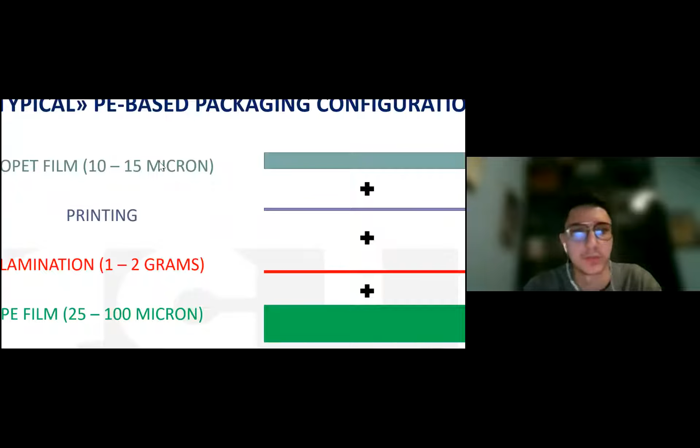Here we have a typical PE-based packaging configuration, where we have the BOPET film that is printed, then laminated with PE film. So we have two types of film, the BOPET and the PE. These are the key features of the BOPET film. Excellent printability thanks to its stiffness, excellent flatness and thermal stability with the consequent excellent workability in converting, excellent transparency and brilliance, then also some bad properties like poor weldability, poor resistance to puncture, and difficulty to recover once laminated with PE. Always, this is the most important point.

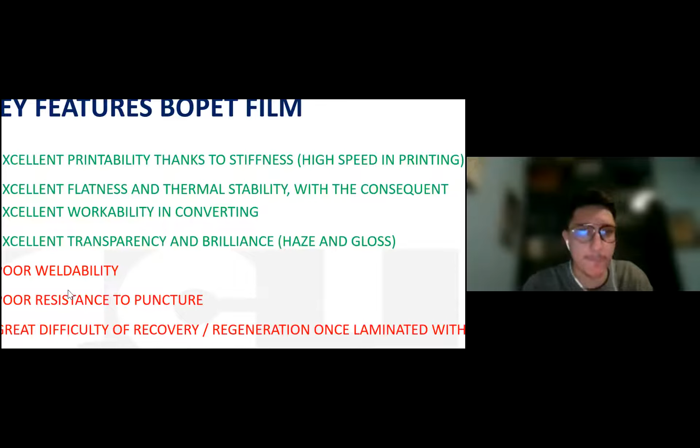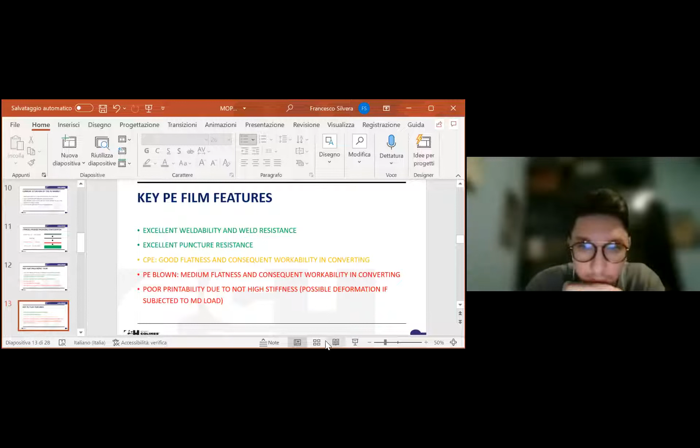Sorry, Mr. Francesco. There's a slight issue with your slide. We couldn't see your whole presentation. It's cut off at the sides. Are you able to perhaps stop share and reshare? Yeah, I can try to do something, sorry. Okay, thank you. You still have this problem, right? Yes, we still have the problem. Perhaps you could exit the full screen. I think we can make do with just sharing this. You just have to zoom in a bit, then it will be fine. I'm sorry for that. No problem. Francesco, can you try to go down to the bottom, click on that, no, this one more to your right. See whether it works. No, it doesn't work. It's still facing the same problem, because it doesn't fit into the frame of the screen.

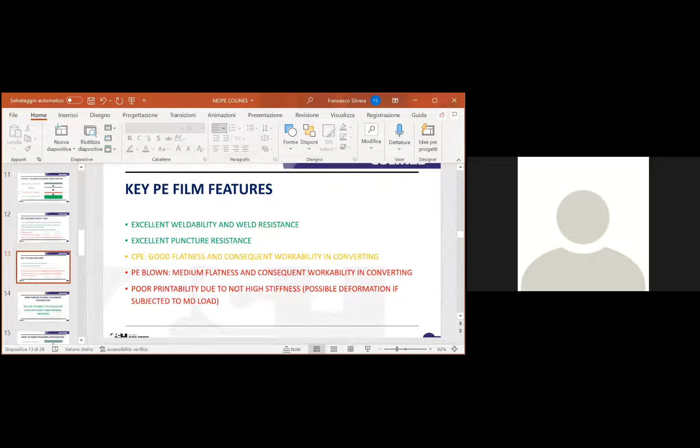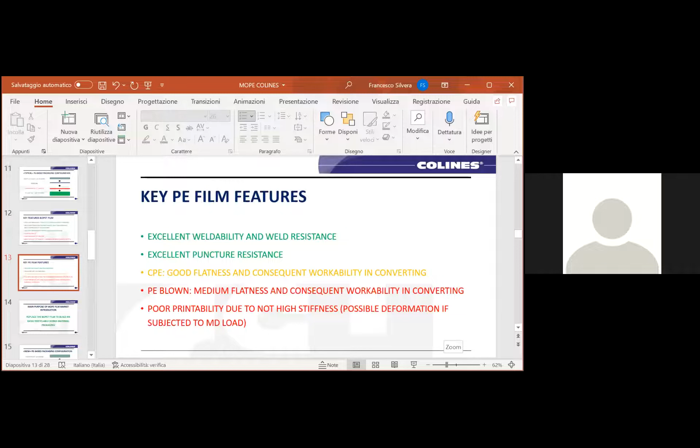Yeah, because I think it's in 69, but the presentation has to be made in a different configuration. Can you reduce the size? The sliding scale there, you put 62%. Bring it down a bit more. Like this? Try that again, a bit less. No, a bit less. Some more. Okay, now click on full. Okay, perfect. It's still a bit, but it's better. Go back and reduce further. Okay, click on that now. I think this looks better. Okay, thank you. Sorry.

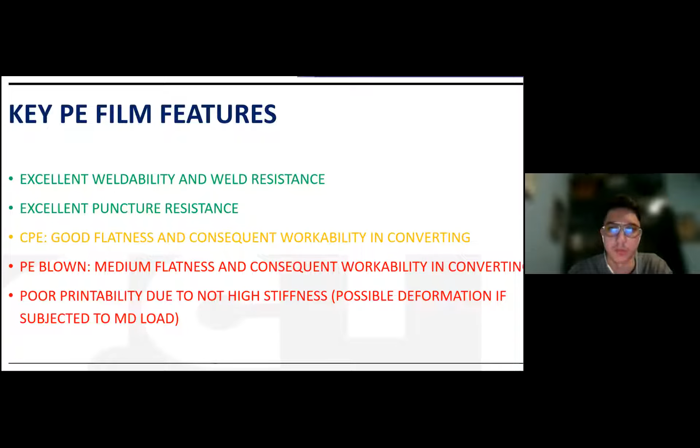So, as I was saying right before, the PE film is laminated with BOPET, and with the PE film we have excellent weldability and weld resistance, excellent puncture resistance. When we have the CPE film, we have good flatness and consequent workability in converting. And then we also have some bad points, like PE blown has medium flatness and consequent workability in converting, and poor printability due to not high stiffness.

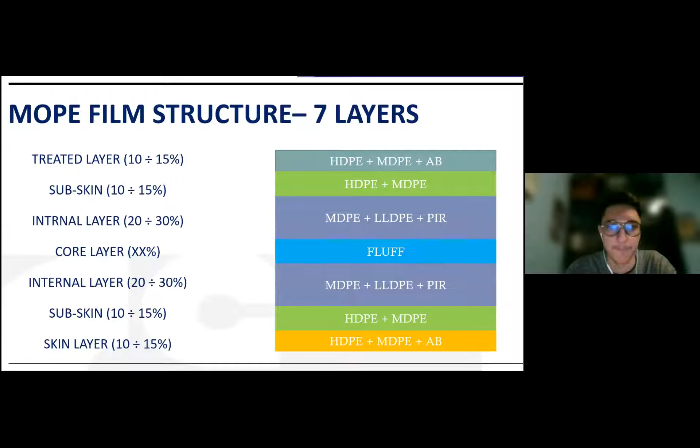What about the raw materials in the processing of the MOPE film? The skin layer needs to be a material that guarantees thermal resistance in the welding operation. Subskin may contain material that helps the stretching process, as well as the core layers. So core layers and subskin have to be material that can help the stretching process. This is the most important process in the MDO unit.

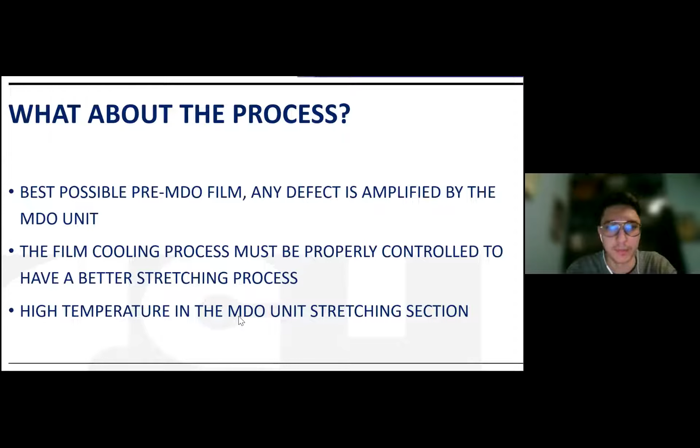What about the process? You need to have the best possible pre-MDO film, because any defect will be amplified by the MDO unit. And the film cooling process must be properly controlled to have a better stretching process. And you need high temperature in the MDO unit stretching section.

Now we'll show you some of the current limits of the actual MOPE blown production, because the production of MOPE film right now is basically only in blown lines. And we have features that are not satisfying in terms of transparency and planarity. We have limits in terms of productivity compared with the cast line, for sure. Possibility to produce only asymmetric film, and a lot of trims that must be regranulated, so we have high cost, and the pellet is not as good as the virgin material, for sure.

What about the cast technology? Why is Colines developing the MOPE? Because you can have higher productivity and higher speed than blown technology, better transparency, better and stable control on the profile, and overall inline trim recovery without any waste. So trims are directly reutilized in the MOPE production. Inline, this is inline recovery for sure.

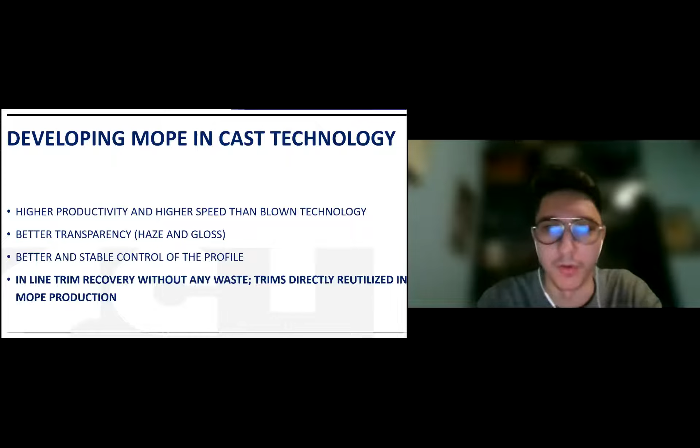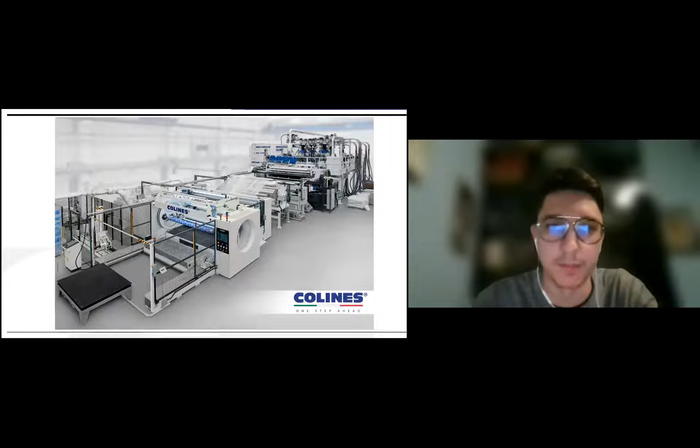And finally, this is our lab line where we produced both CPE film and MDOPE film, and we already have some reels that we can share with our customers or whoever is interested, and we also made some samples of printed MDOPE film, and the results are very, very good, as you can see.

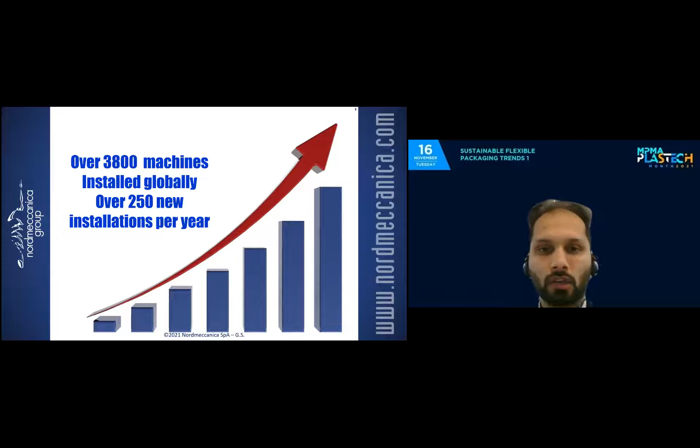Now let's see what are the Nordmeccanica solutions for addressing sustainability and recyclability. I have divided the next sections into three parts: solvent-based and water-based coating and lamination, solvent-less lamination, and Alox barrier mat coating. Let's start with the solvent-based and water-based lamination.

What are the adhesives available on the market nowadays? We can distinguish them into two main categories: low solid percentage adhesives, with 30% resin and 70% solvent, or high solid concentrate adhesives, for example 50% resin and 50% solvent.

And what is our task? Our task is to get the printed web and then laminate it. And how does printing evolve? We have several colors which are combined together in order to get the final image.

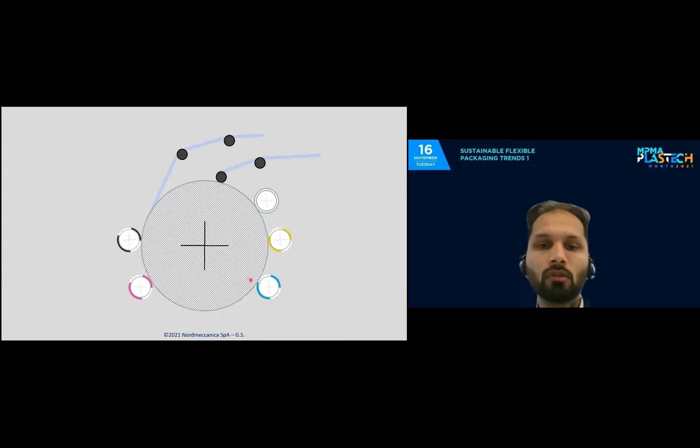Suppose we get the printing, for example, in a flexo printing unit: we have white, yellow, blue, red, and black. If we look at the clear web, how the printing evolves, first we print the full layer of white, then yellow, red, blue, and black. At the end, we get our final image.

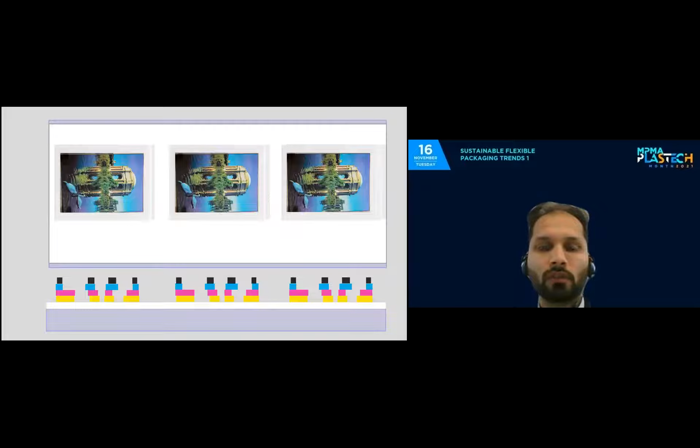So what is the task of the lamination and of the adhesive? It is to apply sufficient adhesive, or a thickness of dry adhesive, that is sufficient to guarantee the required bond. If we consider low solid adhesives, we are applying, for example, 3 grams per square meter, and since this is a 30% solid adhesive, we require 7 grams per square meter of solvent. Likewise, if we consider high solid adhesives, the required dry coating weight is exactly the same, 3 grams per square meter. Instead, for the solvent, since this is a high solid adhesive, just 3 grams per square meter is required.

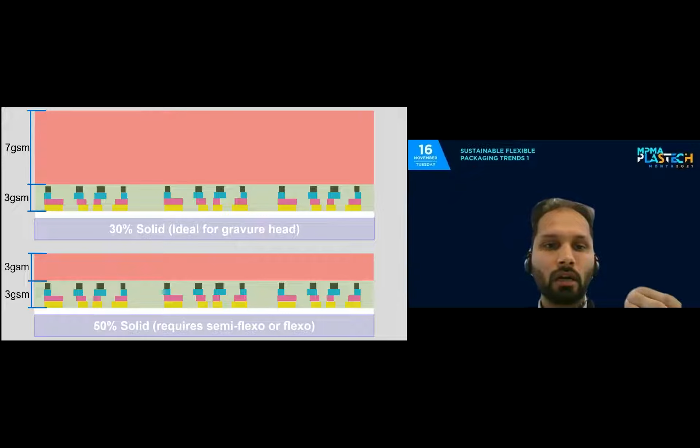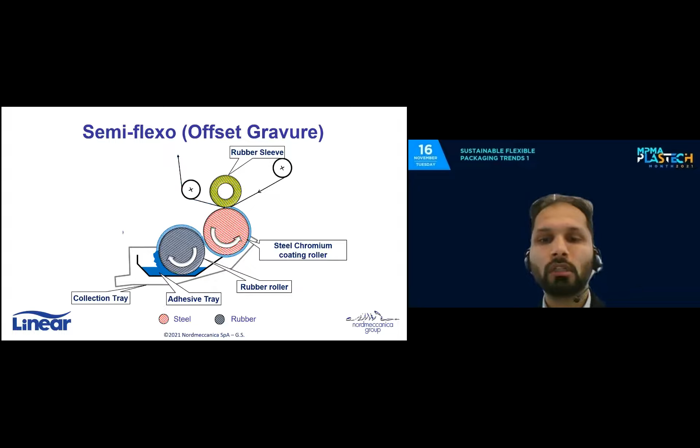One of these is the Nordmeccanica Semiflexo, made of one rubber roller, one steel chromium coating roller, and one impression roller. The rubber roller collects the adhesive from the adhesive tray and transfers it to the steel chromium coating roller. The beauty of this trolley is that both the rubber roller and the steel chromium roller are smooth rollers. By simply playing with the speed of these two rollers, it's possible to adjust the coating weight.

Here's the beauty of it: this is what we have just described. If we play with the speed, we can change the coating weight. With the semi-flexo, it's also possible to work in counter-rotation to apply higher coating weights. Apart from the semi-flexo, we also have in our portfolio the flexo coating 4-roller system. How does this system work?

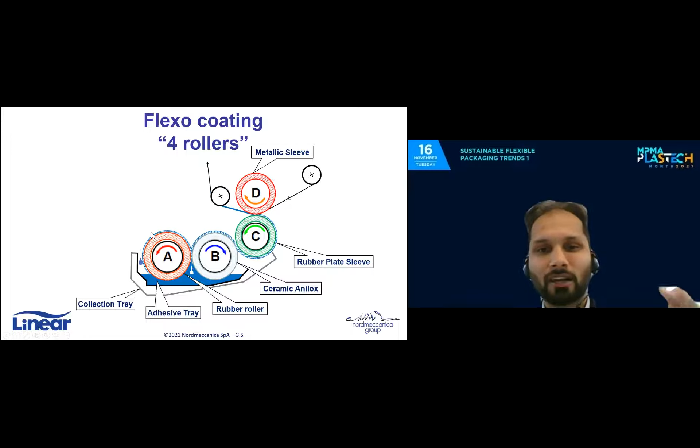Here we have a rubber roller, a ceramic engraved anilox, a rubber plate sleeve, and a metallic sleeve. Both the rubber roller and the ceramic anilox are dipped inside the adhesive. The roller collects the adhesive, and here there is the first gap, the first calibration of the adhesive thickness. Then there is a second calibration between the ceramic anilox and the plate cylinder, and the adhesive is transferred directly to the web. This roller is addressed for high solid adhesives.

What are the main factors in a dry laminator for solvent base and water base? The drying efficiency, the coating technology know-how, the integral stainless steel design, and independent chambers. This is all for the solvent base and water base.

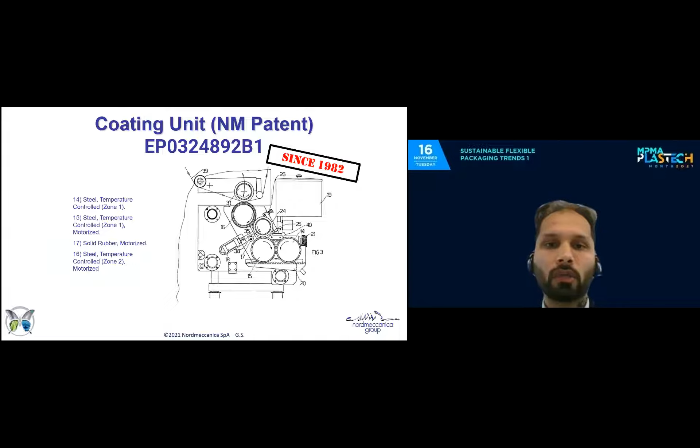Let's now move to the solventless. Back in 1982, Nordmeccanica introduced to the conversion industry the most innovative, the most advanced, and the most reliable solventless coating head, the Nordmeccanica patent 5-roller system, a system that delivering high quality, consistency of the coating weight, and simplicity of use became, and it is still today, the benchmark in the industry. A proof of this benchmark are the thousands and thousands of installations worldwide. Here is the copy of the patent that Nordmeccanica filed back in the early 80s.

How does the Nordmeccanica 5-roller system work? Here we have 2 metering rollers, transfer roller B, solid rubber, coating roller, and the impression roller. The solventless adhesives, made of 2 components, the resin and the hardener, are delivered between the 2 metering rollers, and here there is the first calibration. From this calibration, we have the second calibration between the metering roller and the transfer roller B, and finally we have the third calibration, the fine tuning of the coating weight, between the transfer roller B and the coating roller.

The beauty of this system is that the coating weight is a function of the rotating speed. The Nordmeccanica patent system delivers the highest accuracy available on the market.

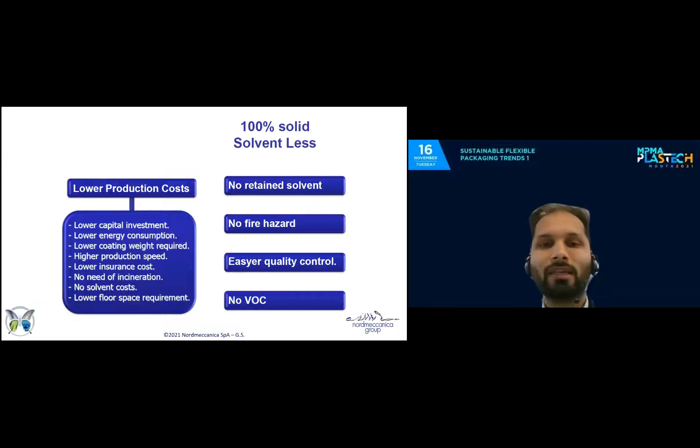What are the advantages of solventless lamination addressing sustainability and recyclability? First of all, lower production cost. Since there is no dryer involved in solventless lamination, there is low capital investment, low energy consumption, and absolutely no solvent required. The solventless adhesives require low coating weight and deliver higher productivity. Since there is no solvent involvement, there is absolutely no risk of solvent retention, and no fire and explosion risks. The overall quality is easy to control.

What are the technology and equipment that Nordmeccanica has provided to the industry with these high-end technologies? First of all, the triplex solventless one-shot, which is an award-winning technology that allows making a 3-ply lamination in solventless in one go. Here is the web path of this machine.

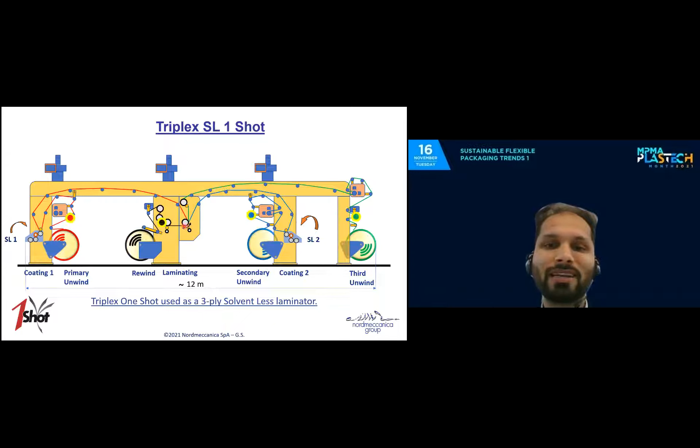What do we have? A primary unwinder, which gets unwound. Here we have coating station number 1, where we apply solventless adhesive 1. Then we have the secondary unwinder, and here we apply the second solventless adhesive. Then we have the third unwinder. All these 3 webs travel together and are laminated in one shot, finishing up at the rewinder.

Here is another example, the duplex one-shot, another Nordmeccanica award-winning technology, which has been brought to the industry in collaboration with Dow, with the Symbiex technology. How do these machines work?

Here we have again two coating sections. But the key feature of this machine is that the two components of the solventless adhesive, the resin and the hardener, are applied on two different coating sections. So there is no mixing unit involved. The resin and the hardener are applied onto separate heads and are mixed together at the laminating unit. After the laminating unit, the reel finishes up at the rewinder.

The key advantage, the key feature of this technology, is that it allows moving to the next conversion process, from the lamination to the slitter, in 90 minutes. And this is guaranteed.

Here is the last example, the latest introduced in our Simplex family, the Super Simplex E800, a machine that has been designed, conceived, and engineered in cooperation with HP Indigo. The name of this machine, E800, in millimeters stands for the web width of this machine, which is intended to serve the typical web width of the digital presses, again addressing the sustainability as the digital factories require.

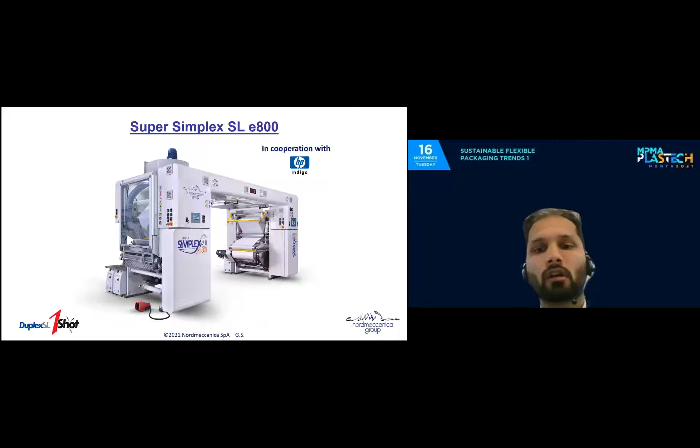Now let's move to the alox and barrier met coating from Nordmeccanica's Metallized division. What are the classical three-ply lamination webs? We have the printed web, which could be paper, polyester, BOPP, nylon, and the properties of these webs are heat resistance and stiffness.

Then we have the middle layer, the second layer, the barrier. This could be aluminum foil, polyester metallized, or polyester AlOx, and the property of these barrier webs is protection from light and barrier and water. Then we have the third web, the sealant web, typically LDPE or CPP, which has the heat sealability properties. So what do we have to do in order to address recyclability?

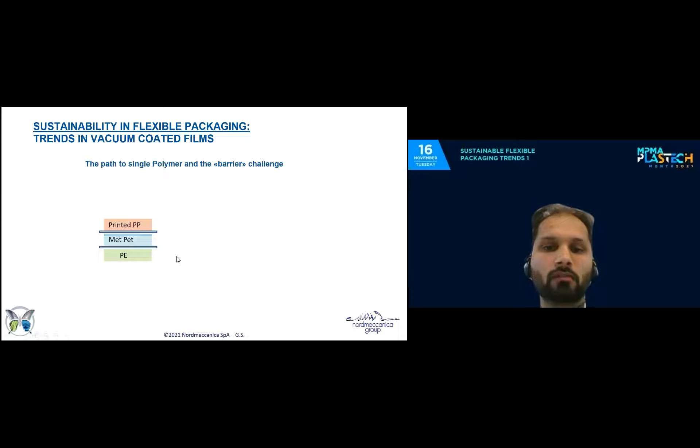We need to redesign the conventional three-ply structure into single polymer structures. How can this be done? For example, we have printed polypropylene, metallized polyester, and polyethylene. So from the multi-layer, we can go to an all polyolefin structure. We substitute the metallized polyester with metallized BOPP.

Or we can go from the multi-layer to an all two-ply BOPP, or even to an all polyethylene structure. What is the aim of this new design? The standard three-ply structure is not recyclable. But if instead we move to a single polymer structure wherever possible, so two-ply all BOPP or two-ply all PE, the structure becomes recyclable. The main challenge nowadays is to transfer the barrier properties from the standard ply to the new recyclable structures.

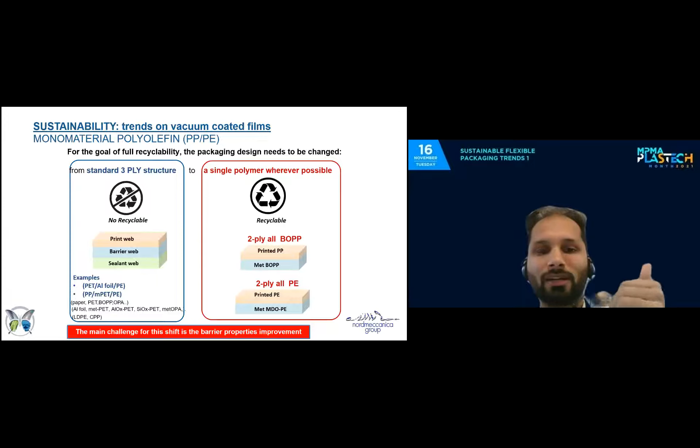So what technologies are available to address this sustainability challenge? The barrier mat is an oxide layer interposed between the polymer and the metal barrier layer. The advantages of the barrier mat are two: first, it increases the barrier properties of the web, and second, it increases the metal adhesion properties on the film.

Another technology is the AlOx. AlOx is a reactive evaporation process. Here, what we have is a combination and reactive evaporation between aluminum evaporation and oxygen injection. The combination of these two generates aluminum oxidation, and this aluminum oxidation condenses on the film substrate, generating a clear barrier web.

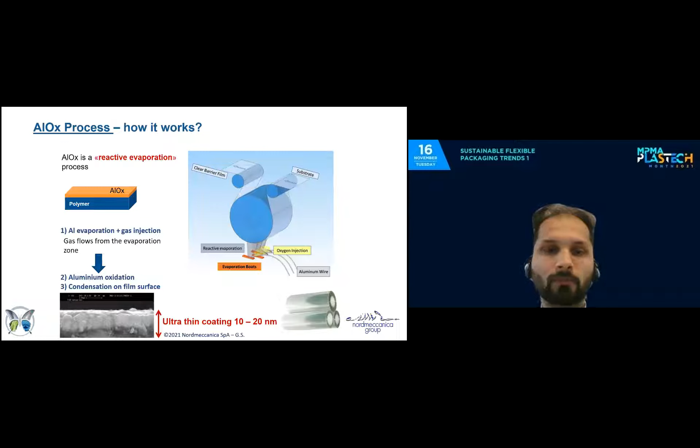If on one hand the AlOx delivers excellent oxygen and water barrier properties, on the other hand it's a very fragile structure. So on the market, there are also top coatings available that increase the mechanical protection of the AlOx, and on the other side significantly increase the barrier properties of the AlOx coated web. With Nordmeccanica's portfolio, we are able to deliver the depositing of the AlOx, the top coating for protection, and finish up for the lamination.

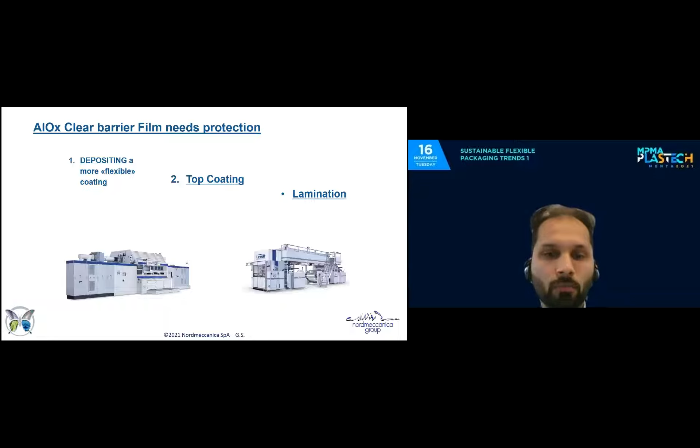And this is all for my presentation.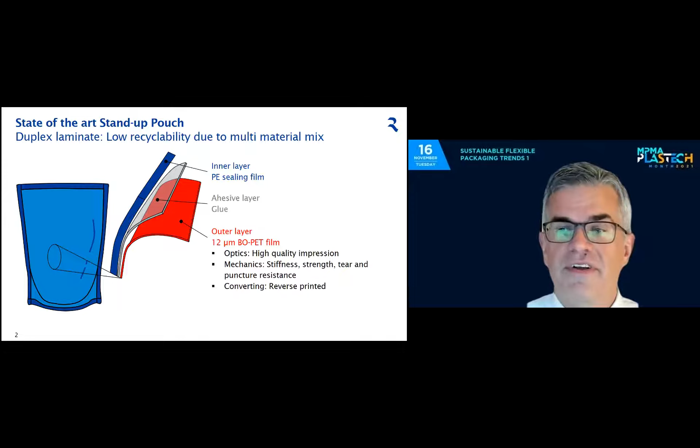One solution is the stretching of PE film with a certain content of HDPE, because if I stretch it 400, 500, even 600%, which is not uncommon, from a primary thickness of say 130, 120 microns down to a range of 20 to 25 microns, the nature of the film is changing. I get very good optic properties. I improve the stiffness and the strength of the film, and I get a quite stiff film, which is convertible either by flexo or by rotogravure printing.

So by doing so, I get a film which I can use for the PET replacement, and I can create a fully recyclable stand-up pouch like this one, which I hope you can see at least a little bit, which has very good mechanical properties. See the E modulus in machine and transverse direction of 1,500, 1,600. For sure, it's not as good as the E modulus for PET, which is well above 3,500 up to 4,500, but it's still good enough to meet the properties of such kind of pouches.

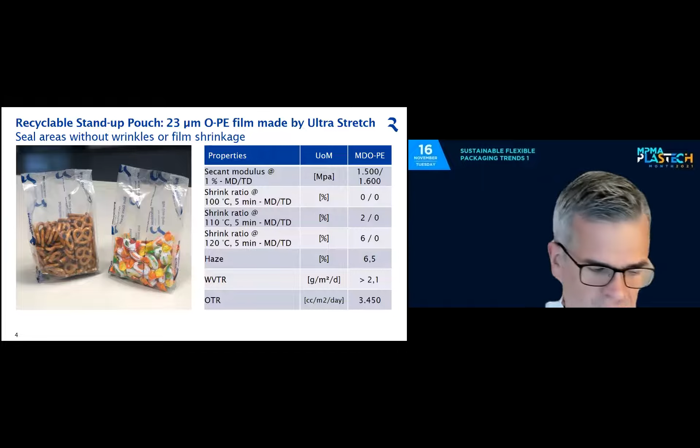So if we talk about replacing solutions where nowadays high barriers are required, these laminates are usually made of, again, a PE sealing film, but a metallized PET or aluminum and some BOPET or BOPP film. So really a triplex solution, a multi-material solution, which takes a little bit more work to replace the metallized PET and the BOPET or BOPP in order to come again to a recyclable pouch made mainly of polyethylene.

So if you look for a monomaterial packaging with a barrier, this means avoid the aluminum, use mainly polyethylene, and create barriers by metallizing, by AlOx or SiOx technology, or by a very low content of EVOH, where one usually says that the content of EVOH should be less than 5% in total in order to name it recyclable. So the EVOH layer in such pouches shall be very thin.

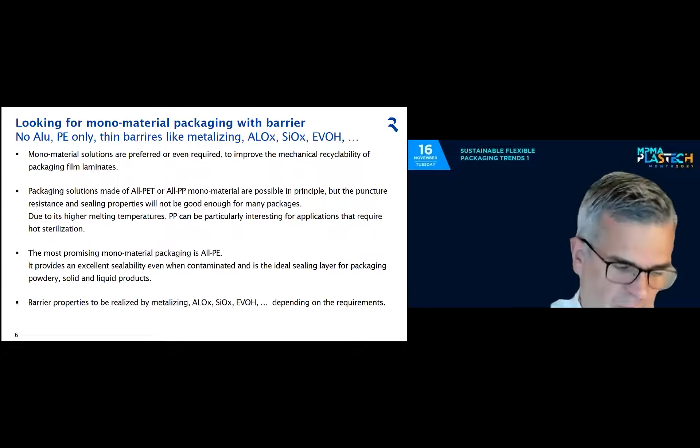At the moment, we have properties with a standard barrier composite made of BOPET, aluminum, and a PE film, like an oxygen and water transmission rate well below 0.01. Unfortunately, not recyclable. So if we look at the standard pouch I mentioned in the beginning, which is made of a stretched PE film, film number 1, and a lamination film out of polyethylene.

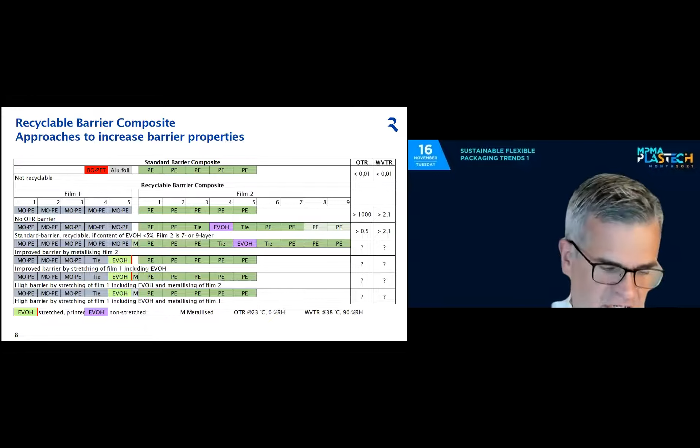And we were able, by doing so, to reduce the oxygen transmission rate below 1, but for the water, we are still well above 1. So the question comes up, what can I do if I need even better water vapor transmission rates? Well, very simple,

metallize the PE film. So again, we have a stretched 5-layer film, PE and EVOH, like we had in the example before. But we took the PE lamination film, which was a very simple film, 3 layers only, and we metallized it. We came up with a total thickness, in this case, of 70 micron, again, 30 micron for the stretch laminate made of PE and EVOH. And the metallized PE film was like 40 microns, stretch ratio 5.5 for the PE EVOH 5-layer film. And then we end up with oxygen and water vapor transmission rates both well below 1, giving some nice barrier properties.

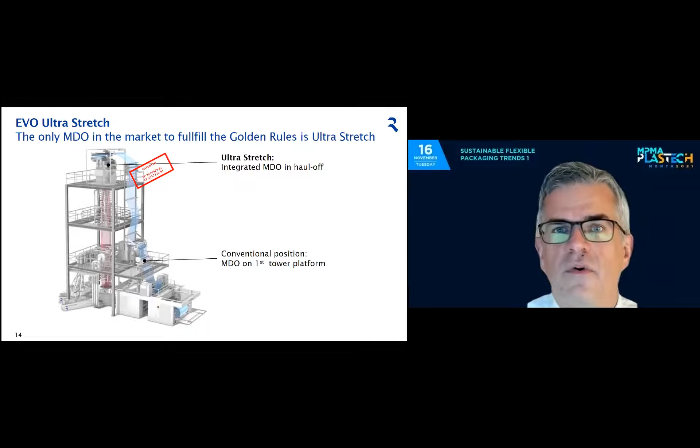Well, if you take these three rules into consideration and rethink what is the best position for an MDO, it's not on top of the winder, it's not somewhere between the turnabout system and the winder. No, it is integrated in the haul-off. And this is what UltraStretch is all about. UltraStretch is the solution of Reifenhäuser for stretching film.

It offers you the advantage that the film hits the MDO 2.5 times earlier than would be the case if the MDO is on top of the winder. So the film has lower crystallinity, and you need less energy to heat it up to stretch the film, and vice versa, the film has all the way down to the winder to anneal, to shrink. Again, 2.5 times longer than if you put the MDO on the level of the first stage, just above the winder.

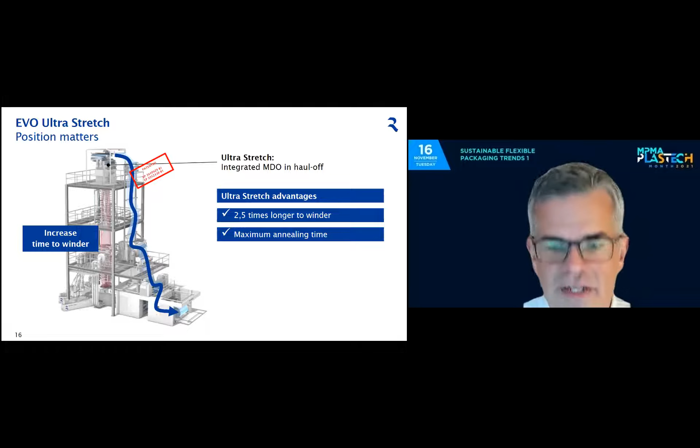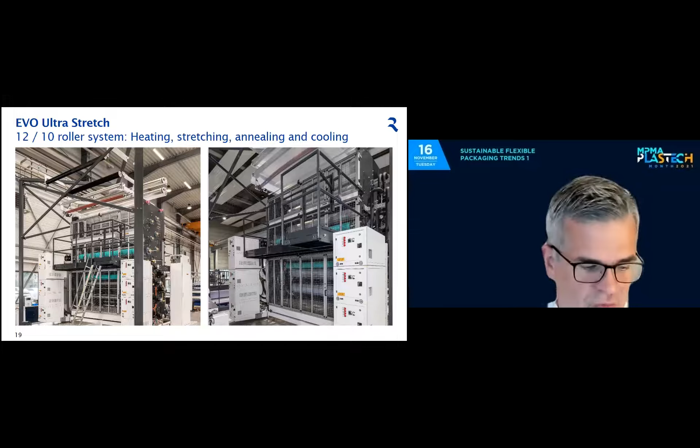Yes, it is a full MDO with 12 or 10 rollers. It's available in a large and a medium size version, with all needed stages of stretching, rollers for heating, for stretching, for annealing, and for cooling. Each roller is individually driven by a motor and individually heated up to 120 degrees C.

And last but not least, yes, it's on top of the line, but it has all features to enable a good, easy and smart operation. So we have a chain for feeding in the film, and good accessibility for maintenance. You have access to all rollers via the front and the back side of the MDO, and to the upper rollers you have access via this balcony here, which we find on the front side and the back side of the MDO.

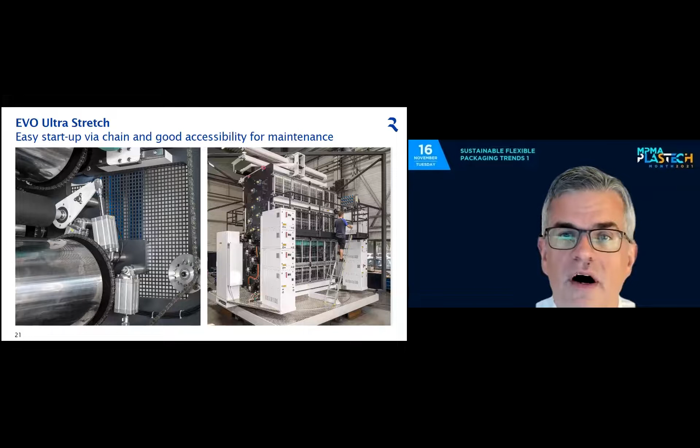So this is the UltraStretch, the solution for stretching film, useful for all-PE film to be used in pouches with or without barrier. And that was my presentation on barrier packaging, monomaterials.

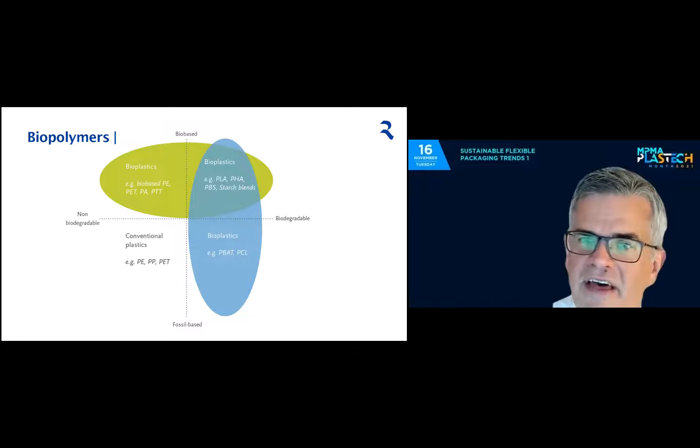But let's have a look at starch-based films. The basis is renewable raw materials based on corn, potatoes, etc. It is industrially compostable, so it's a true biopolymer. But if one looks at the applications, one has to say that the appearance is quite hazy. It has a low stiffness, shows high permeability to moisture, but it can be blended with other materials to modify properties.

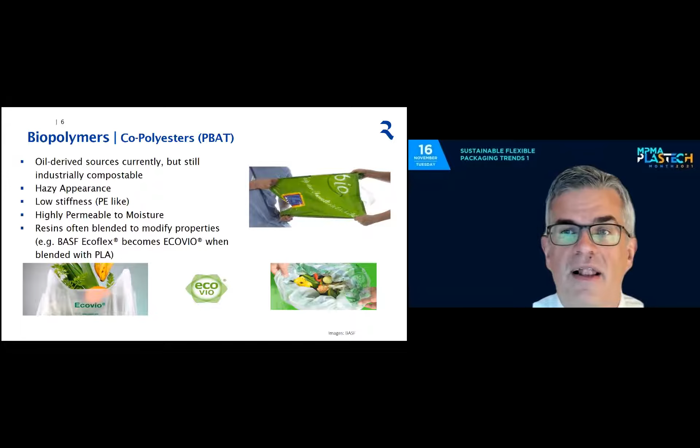And well, I will show you in the next slide what one can do by machine technology, because these bags have one disadvantage, and this is the elongation if I put some goods in these bags. And the same is true for biopolymers based on copolyesters, which are usually oil-based solutions, but they are still compostable and show more or less the same disadvantages in terms of properties: hazy appearance, low stiffness, high permeability to moisture, like the starch-based polymers.

So what can we do about that? Well, in my previous presentation, we saw the solution of using PE as a material to create properties by stretching 300, 400, even 500, 600% to change properties, so these PE films become a possible solution for the substitution of PET film or BOPP film. And if we talk about stretching, one can stretch a little bit lower. And this is the way to modify the properties of those biopolymers.

If I talk now about stretching, I don't talk about 300, 400 or more percent of stretch. I talk about a stretch rate between 70 and 100% to improve properties of biopolymers, giving them a little bit better appearance and a little bit better mechanical properties. And the tool for doing so is, again, a stretching unit positioned on top of the line. But in this case, we do not need so many rollers like we need in an MDO to stretch 500 or more percent. That was like 10 or 12 rollers. We need something with a little bit fewer rollers, and this is what we call the UltraFlat Plus haul-off.

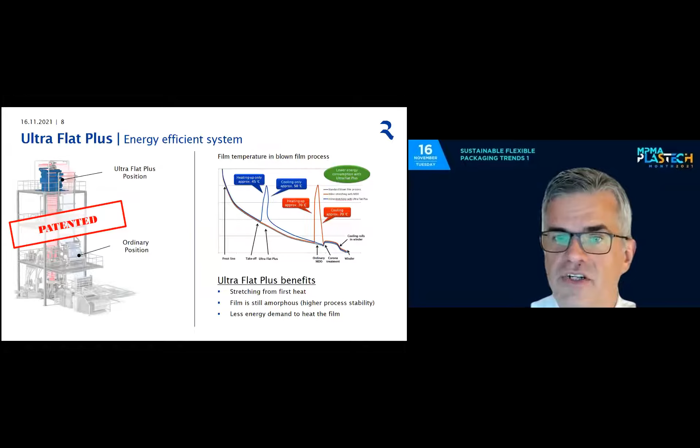This system consists of only 4 stretching rollers, 1, 2, 3, 4 rollers. These are the nip rollers. Here you would have the A-frame. One for heating, a second one for heating, and then I do the stretching between roller 2 and 3, and the last one is used for cooling. And again, each roller has its own temperature circuit. Each roller has its own motor. And the stretching range with this unit is between 1 and 100%.

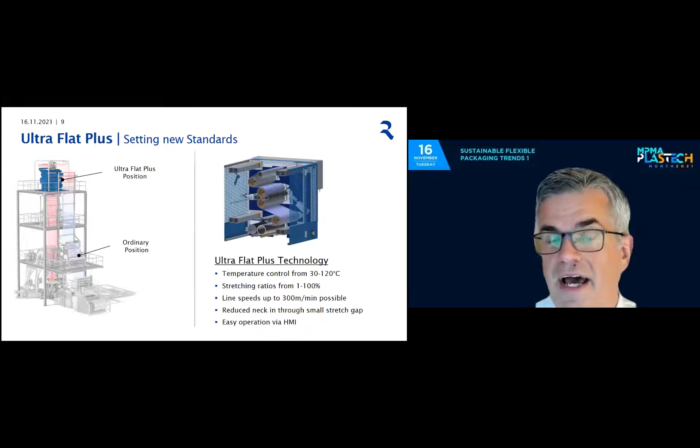And just one fact which I would like to remind you of: you might have heard already of UltraFlat, which is an iron for film to improve flatness. This is for sure included in this device. So if I apply only 0.5 to 1.5% of stretch, I will reduce camber and get better flatness of my lamination film, which will allow faster bag making and faster converting operations.

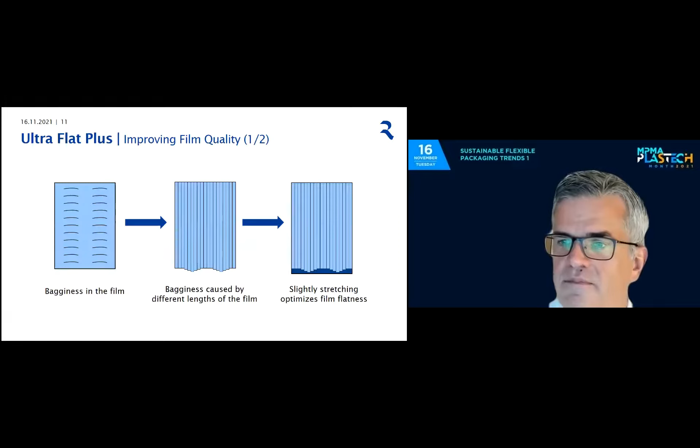The result of stretching only 1 or 1.5% is this one. On the left-hand side, you see a film without a flattening device, without being flattened by stretching 1.5%, and on the right-hand side you see the film with an iron function applied to improve flatness of the film. So yeah, you can use this unit, stretching only a little bit, to improve properties of lamination film.

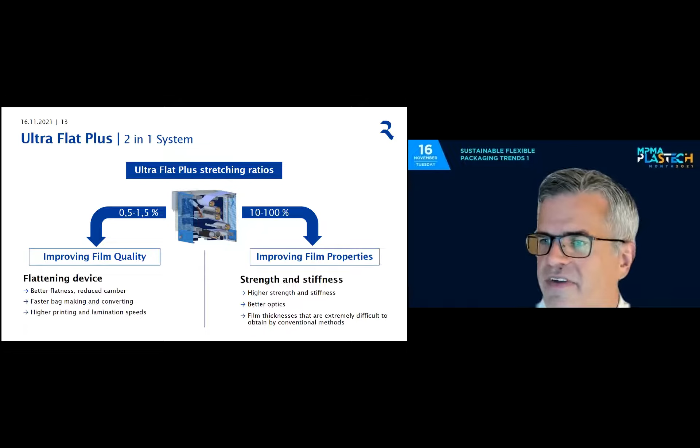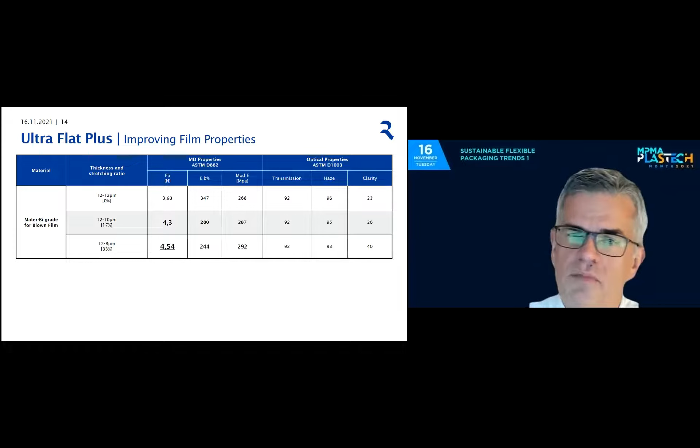And what we see is that we improve the stiffness of the film, we improve the clarity of the film, and we improve the force and reduce the elongation at break. So we improve those disadvantageous properties of biopolymers by using machine technology. So exciting, we can reduce the thickness, which is usually 12 microns, and down gauge it to 8 microns. We have better properties of the 8 micron film compared to the non-stretched 12 micron film. The exciting thing is down gauging and getting better mechanical properties. About 33% is the saving of materials.

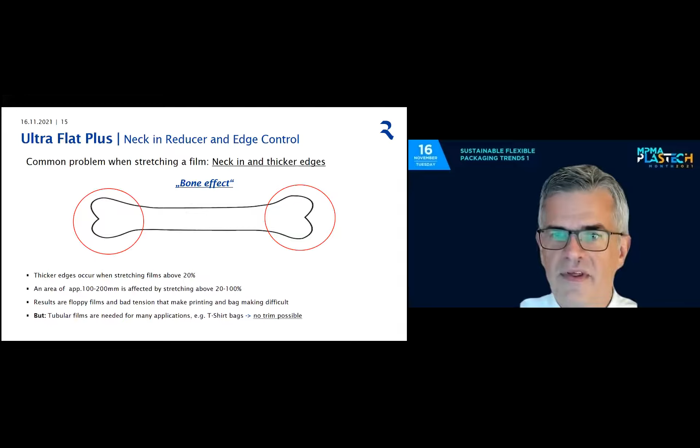And there's one thing which I have to tell you, which was mentioned already in the presentation of Colines, of Francesco. If we stretch the film, we get something which is called bone effect. Unfortunately, stretching does not occur evenly across the whole width of the film. A common problem is necking and thicker edges. And if I make bags, I cannot cut away the edges. There's no way to do so. Unfortunately, it is above 20% thicker. So I have to take care of the left-hand side and the right-hand side of my tube. Again, trim is not possible because I have an application for bags.

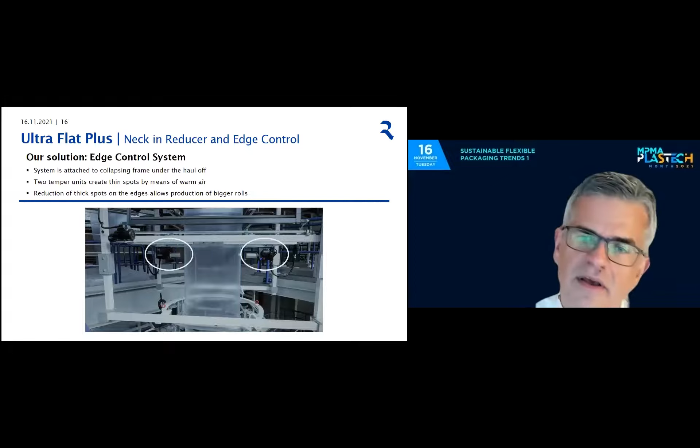And we found a solution for that, which we call edge control system, where we apply some heat just before the collapsing frame under the haul-off, where we warm up the edges of the film and, by doing so, reduce the thick spots at the edges. And by doing so, we can realize big rolls of material by reducing this thick edge, the bone effect. And with this comment on a solution for the thick edges of stretched tube film, I would like to close my presentation and say thank you again for your attention.

Thank you very much for sharing, especially your data on the OTR, oxygen transmission rate, and also the vapor transmission rate. It's very informative. It looks like we are set and ready to have a mono material. Those numbers match even that of aluminum foil. It looks like a reality that we can have a mono material moving forward. Also, thank you for letting us know that we can stretch the biomaterials, which are always very soft, to make them stiff with better mechanical properties. Thank you, Dr. Christoph.

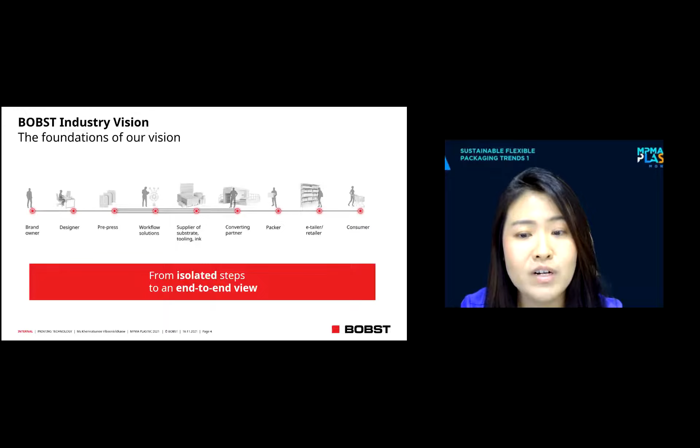We deliver more than the printing machine and services. We develop software to ensure connectivity, provide business consultancy, and help our customers develop new innovative business models.

So this is our company vision. We translate company trends into connectivity, digitalization, automation, and sustainability. For connectivity, our machine tooling systems can also talk to each other, and we can work on a cloud-based system to transmit data.

Our aim is to be the factory of the future, where the customer can provide a PDF file that becomes the end product. Our automation means we have smart robotic and smart sensor systems to perform operations with increased quality, saving time, manpower, and cost.

So to come to the topic, the challenge of MDOPE. Everybody now is talking about sustainability, and the word sustainability has moved very quickly to the strategic part of our business. The end of 2025 is no longer that far away. The solutions and applications need to be ready to be recycled, sustainable, monomaterial barrier solutions, and thinner packaging. We know that leading brand converters and packaging companies have made an important commitment to reach 100% reusable, recyclable, and compostable packaging by 2025.

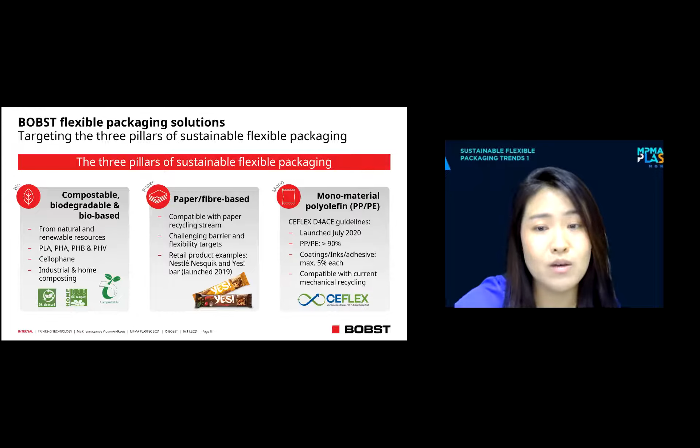The challenges of MDOPE we found in 3 dimensions: first is the surface polarity, secondly is the thermosensitivity, and the last one is the web handling.

How to improve the adhesion of MDOPE: we found that during the coating phase, a challenge is the poor surface energy of MDOPE, which has low polarity. The dyne level of MDOPE is around 40, and therefore the surface needs to be properly refreshed to achieve good adhesion between the polymer layer and the base film.

The function of the primer layer is to enhance both oxygen and water vapor barrier, but more so for oxygen, since the barrier against water vapor will be promoted by our metallizing process with AlOx or SiOx. This provides a good platform and polar surface for the deposition and adhesion of a subsequent metal layer, and helps improve the adhesion onto the base film.

There are several chemistries available in the market, however, the best-in-class coating is the one that is able to meet all those requirements. MDOPE has a tendency to elongate, especially upon the combined application of heat and tension in the dryer. For instance, on the printing side, we also make sure that our MDOPE film will not stretch and also will not shrink during processing.

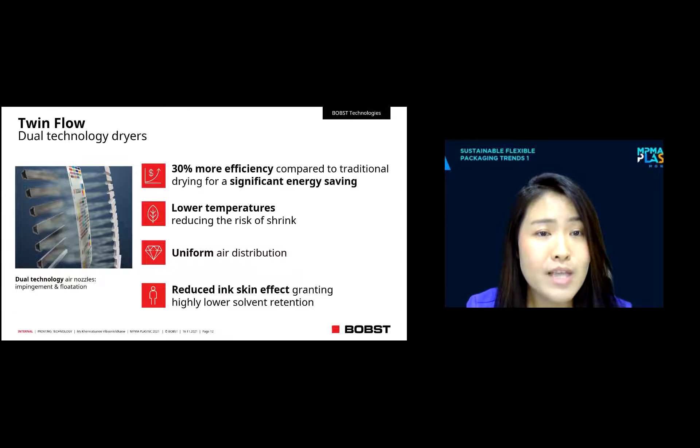The next one, we talk about the best web handling. We ensure excellent performance to handle critical substrates like MDOPE or even thin film and thin aluminum. Our web handling can handle properly with very precise control. So from our experience, we found that the best web handling on the machine can also help improve the best print quality as well.

So this is our performance sample. We're talking about our rotogravure, we use MDOPE 25 micron to print at maximum speed of 500 meters per minute on the rotogravure, which is also quite critical. But our dryer and registration control also help us improve this. And this is not only a competence center model — our customers nowadays already can print MDOPE film on our rotogravure.

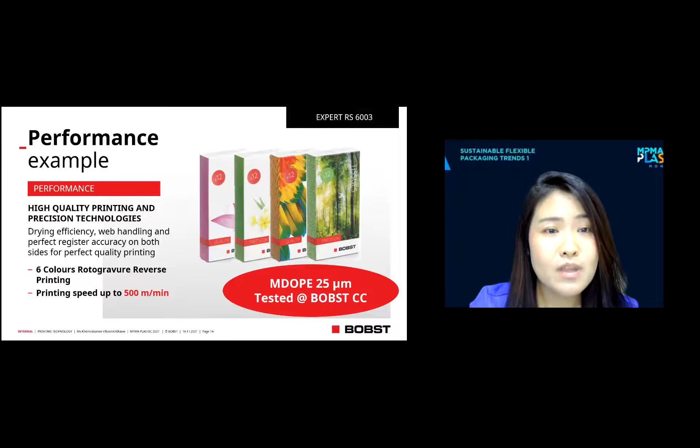So CI Flexo. I think most of you already know that the CI Flexo can handle sensitive material like LDPE or MDOPE easily. But last year we launched the new Master CI. Our Master CI is a state-of-the-art machine that includes advanced technology and an advanced robotic system. We can change the roll and also change the sleeve, anilox, and doctor blade automatically to ensure this machine is fit and can digitalize the workflow in the future.

Our aim is to get the file artwork from the customer as a PDF and also deliver it digitally, along with a twin PDF file, to the end user.

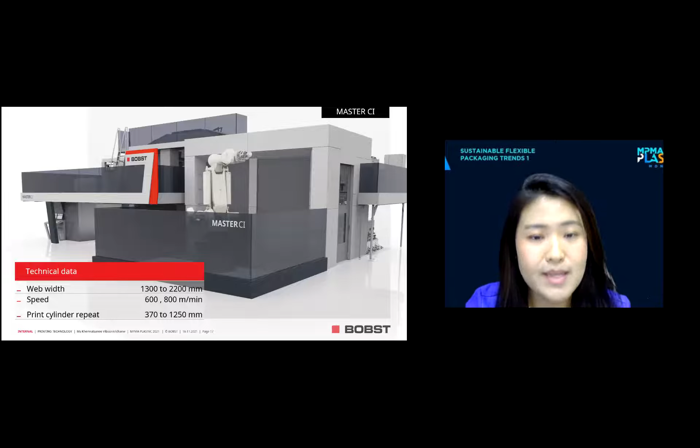So this is our technical data. For the Master CI, we talk about 1.3 meter web width available up to 2.2 meters. The maximum speed is 800 meters per minute, with an option of 600 meters per minute. And the print repeat available is 370 to 1,250 millimeters. I think for flexible packaging, this web width is already enough.

But with the high speed, we also have to ensure higher capacity and the best web handling are perfect. With our performance on the Master CI, we talk about MDOPE 20 micron with 7 color plus white, at a production speed of 800 meters per minute. And this one we can not only handle properly, but our perfect printing quality is also available on this model.

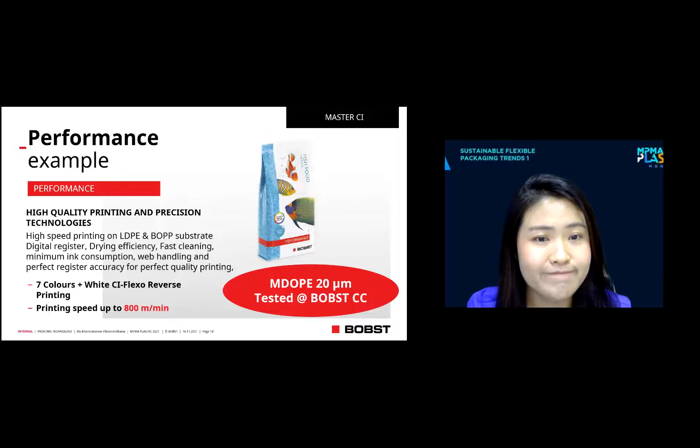The last one is our Vision CI. Our Vision CI is what we call smart in price, with the best price performance value. The machine also offers flexibility and sustainability.

Our size is a very compact design to ensure superior output quality. We also have our Smart Set to help get good registration on the printing. And our Smart Heat also ensures that heat can be regenerated with a green environment concept.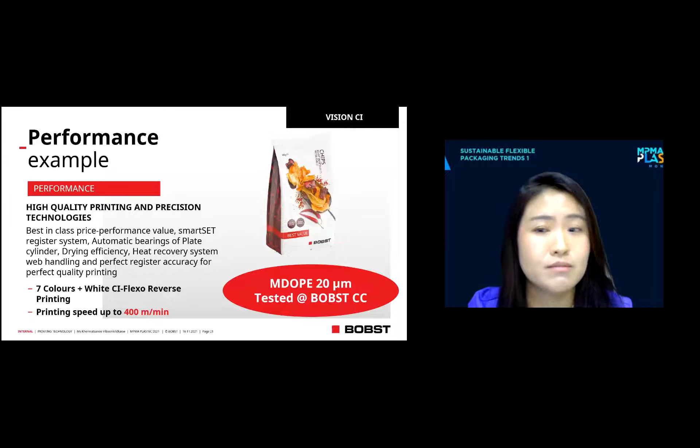So our next one is what we call Bobst oneBARRIER. Bobst oneBARRIER, you can also see that for the mono material, we try to use PE and EVOH-free to be fully recycled.

And for the structure and detail, my colleague Mr. Lucas will discuss more on the 23rd of November, because he will share his subject on coating and metallizing on this kind of one barrier monomaterial application.

So in summary, across the entire packaging chain — brand owner, agency, converter, retailer, and consumer — with our advanced technologies, advanced robotics, and digitalized production workflow on Bobst, vacuum metallizer, printing machine, rotogravure and flexo printing, with emerging new substrates such as MDOPE, PP, BOPE, BOPP, CPP for new monomaterial recycled packaging, coating and laminating technology — we have the know-how, the capability, and the ability to support you at every step. That's why we are the right partner for you, together, to conquer new business growth together.

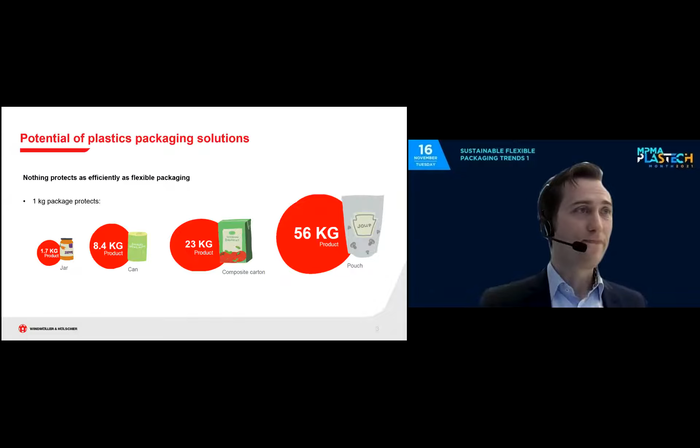Also, when we look at growth and urbanization, which lead to challenges as transport distances and volumes increase, plastic packaging has huge potential to help the sustainability discussion. Looking at each person on average, if we assume each person causes 9.7 tons of CO2 emissions, plastics don't have that big an extent in that calculation, still only about 0.1, rather small compared per individual. Nevertheless, due to the about 8 billion people on this planet, it's still very valid and super important that as a manufacturer, and as part of the industry, we develop new solutions to further reduce the CO2 footprint across the industry.

So basically, our 3 fields of action at Windmöller & Hölscher in terms of sustainability are summarized in 3 categories. We have Packaging 4.0 solutions, where we integrate new IoT systems into the production environment to make them more efficient. We have efficient production, meaning production of films, today particularly cast film, where we try to make that production as efficient as possible to reduce the CO2 footprint and reduce wastage. And of course, we are also very interested in partnering up in the industry, developing sustainable solutions, making demonstrators, and thinking about potential packaging solutions which help the industry become more sustainable.

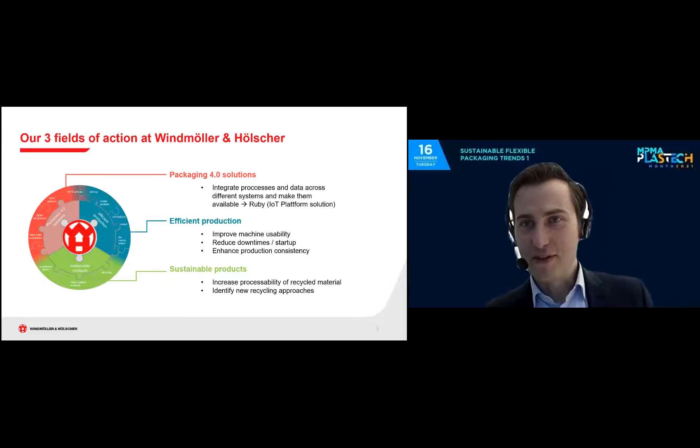And of course, what can we do on the machinery side in order to be able to produce such kind of films. Today, I would like to give a short example in each category for everyone, and just guide you through, of course, today with respect to cast film. And I'm happy to listen to a lot of questions in the end, if there are any.

So starting with sustainable products, I would like to give you a brief overview about an all-PP solution, where we talk about the typical standard pouch. Most of you know that the typical standard pouch is a 3-ply system, usually made out of a counterprinted BOPET or BOPP film, which is laminated against aluminum, a barrier layer, which is consequently laminated against a sealing layer to enable the sealing properties.

The problems with that structure, I think, are obvious. PET in the recycle stream is a problem, as well as solid aluminum, and PET and PP cannot be blended. Hence, there are ideas on how to overcome that packaging to make it a mono material structure. So one of the solutions we have been thinking about is to replace a 3-ply product, which is a blend of different resins, with a 2-ply product, which just consists of polyprop, right?

Basically, the idea is to have a counter-printed BOPP film, which is giving the optics for the printability and the heat resistance for the packaging process, and a barrier layer, metallization or an oxide barrier layer, which can be coated on a liner or a base film, which would be a 60 micron, for instance, cast PP film from our machine, the Filmex, which has an integrated barrier layer to improve the overall barrier properties. It provides next to good barrier also good sealing, and of course, adjusted low COF or whatever is required for downstream packaging machines.

Nevertheless, if you look at that particular case, if you want to change the width of your machine in order to change to a new job, you have quite a challenge if you want to do it old school, I would say. So what you have to do is line up pretty much here. And in order to perform a changeover in terms of width, you would have to slow down the machine, you would have to shut down the machine, and you have a lot of manual work involved in order to, first of all, change the width mechanically on the die, and back again to start up the machine, to bring the machine in production specs, and to make sure that you start up with a good reel.

So all the work involved takes a lot of time. All the machine running time until the machine is back in specs, meaning you start up the process, you have to make sure your profile is good. It just takes time. If we look at typical values we get from the market, you are ending up with approximately 60, 90 minutes of setup time, sometimes less, sometimes more, which is a rough indication of how much time you need for a job change, right? That time you use is wasted time. The time you're producing, trying to put your machine in spec, is wasted time and resources.

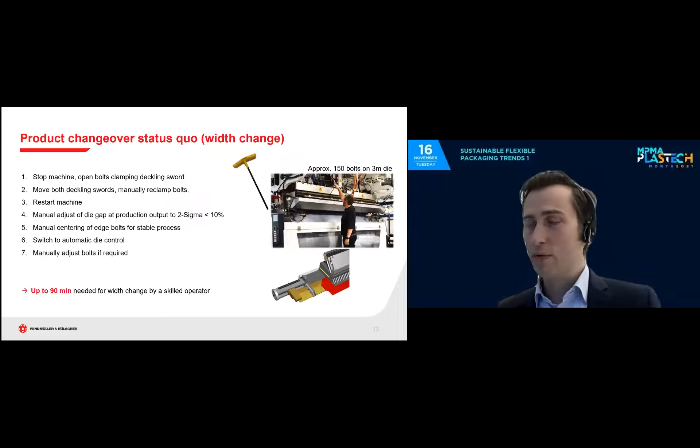So one of the long-term developments we looked forward to is to somehow overcome these issues, to automate that process, to give our customers a chance to be more efficient, particularly in job changes, not just width changes, but also other changes like gauge changes or recipe changes, for instance. What seems to be straightforward is not that easy, I would have to say. So we put a lot of brains into it. We partnered up with a company, Cloeren. We had a development for over 2 years with a lot of prototyping, and could launch our die control wizard, our solution for the challenges in daily production, at the last K 2019.

So the innovation we presented, we called die control wizard. More or less, it is a fully automated system, able to perform a width change not in 90 minutes, but in less than 20, with the least amount of operator interference. So basically, you change the width by the press of a button. I myself actually tried it in our technical lab. Our process engineer schooled us, which is funny because I was able to manage a product changeover in 10 minutes. After I tried 2 times, it was pretty straightforward how to do that job. So if I can do it in a short amount of time, it's something which I believe everybody can learn, and it is super perfect.

Once you know how it works, the amount of time you are spending and wasting is reduced to a minimum. So you are reducing a big amount of cost and scrap involved, and you increase your production yield as you have more time in good production. Talking to a lot of customers in CPP production, that was more or less a small game changer in their production. I believe we have over 80 systems now in the market, which is quite a good count, and the market feedback is quite positive. We're still working on improving that system, but it is actually working very, very well.

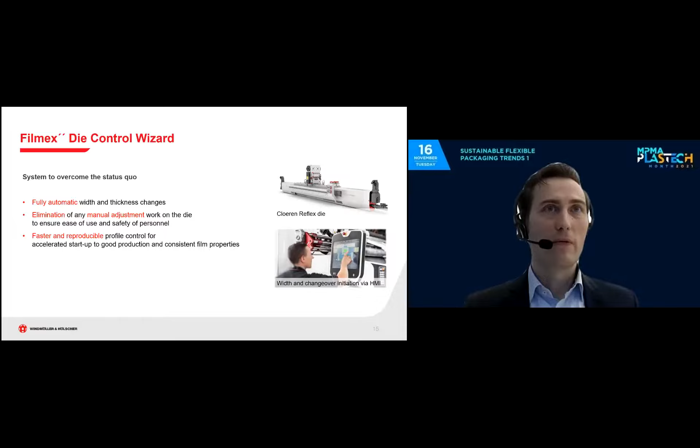So this would be our topic in terms of efficient production. I would like to go over to our last point for today's presentation, which are packaging 4.0 solutions. Also short thoughts on that. So why are data analytics important?

I want to say that the correlations in the systems, in the machines are there, but they are not seen, and to enable you to see them or correlate different trends, you need a lot of data, which can consequently improve your process know-how, improve your production, and identify quality topics. So in order to have that amount of data, you need to collect a lot of data, not just on one level, but on different levels, on different machines. You also have to make sure that these data can be exchanged. Hence, you need something which is fulfilling that particular job.

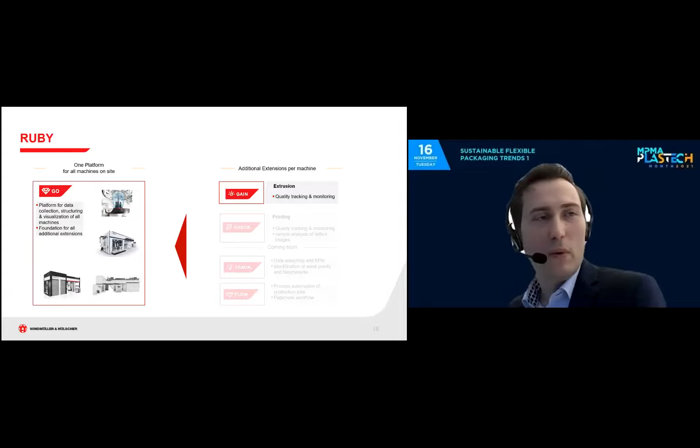And based on that data platform, we are developing extensions for each particular production environment. Today, of course, we talk a little bit about extrusion, but generally, once you have the data, you have to find a way to make it usable for you, not just to visualize, but also to enhance your production with different things. Here we are in constant development of our extensions to bring them to the next level. Of course, somewhere down the road, we talk about a fully automated machine where the computer is telling the machine how to adjust itself. Future music, an ambitious goal, maybe we can get there in time. But let's stay at the beginning, step by step first.

You can play with a lot of correlations. You have an overview about your production setup, and you can learn from past production runs in order to improve your efficiency even more. So here we are happy also from the feedback from our customers, helping in terms of quality and in terms of production, and actually enabling customers to see things which they have not seen before.

Basically, to summarize that topic, within the sustainability discussion, it is important and crucial that all parties, including the machine supplier, are striving towards a better future. There's no question that we have to do something with our planet. And in that respect, taking the opportunities in all the action fields we just mentioned, whether increasing the efficiency of production, thinking about new solutions for the packaging market, or using the potentials of IoT systems or packaging 4.0 solutions, is crucial, and is something which has to be followed in order to make the world a better place.

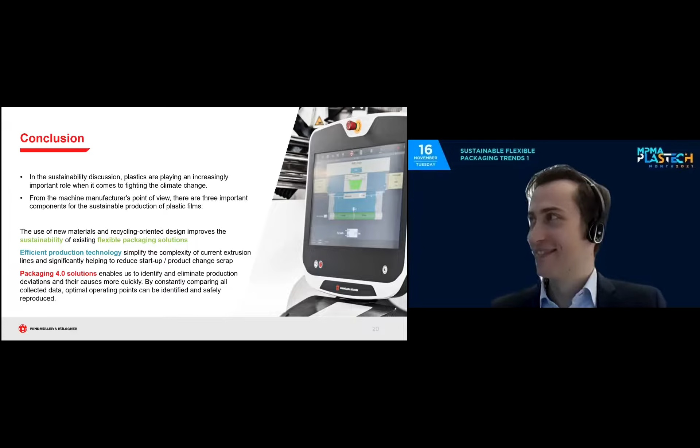Oh my goodness. With your all-sustainability PP solution, are we moving from a conventional 3-layer structure, for example, in a pouch situation where you mentioned just now, a printing layer, barrier layer, and a sealing layer structure, to a 2-layer solution with BOPP and the cast PP taking over the barrier as well as the sealing layer? Correct. It's one of the ideas.

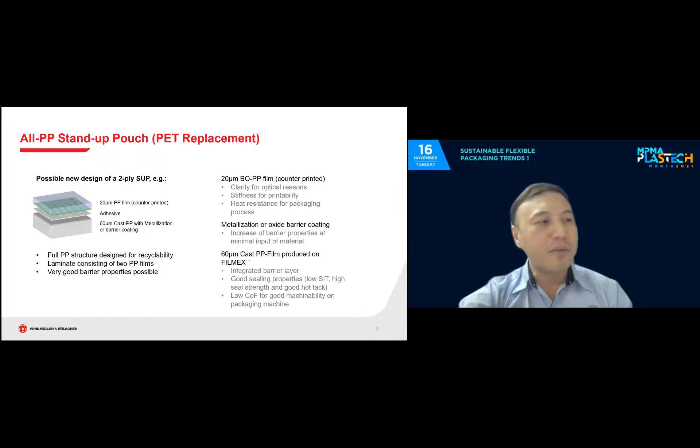Yes, correct. So we move on to the first question that we have, which is very related. It's definitely from a brand owner. What are the costs to brand owners? Should we be expecting, moving forward from a BOPET to an MDO-PE environment, to achieve a cost-neutral transition in terms of the base material? So if you move from a 3-layer structure to a 2-layer structure, how would it affect costs? What do you think, Marcus, before I pass this question to the others?

Yes. It's a very specific question, but from my experience and from what we see, you for sure have a cost impact in any case, right? We are talking about established structures which have been in the market for the last 2 or 3 decades, and now we are trying to shift. So we always have to be clear that cost will be important, and cost will be maybe higher or lower. Tendency is higher. New solutions, different use of materials, right?

Different production steps. And of course, we should not forget the downstream packaging machines. If you use a different system, downstream packaging machines will also be affected. So there is for sure an impact. What is very crucial in our discussions with our customers, we say that you cannot just switch one by one. That's not possible. You will never be able to replace a BOPET film. BOPET is BOPET. Whatever you do with other resins, it's not possible to exchange that.

The question is always, how close can you get to existing solutions with the resources you have, under the legislation we are having? And of course, there will be cost and mechanical or optical side effects, I would say. Mm-hmm. Okay.

Do you see the cost moving down with a 2-layer structure compared to a 3-layer structure? Perhaps this is difficult to say from my end. Best answered by a converter. Yeah. Okay. Difficult to answer for me at that stage. What do you think, Dr. Christoph? Because this question is actually directed to you.

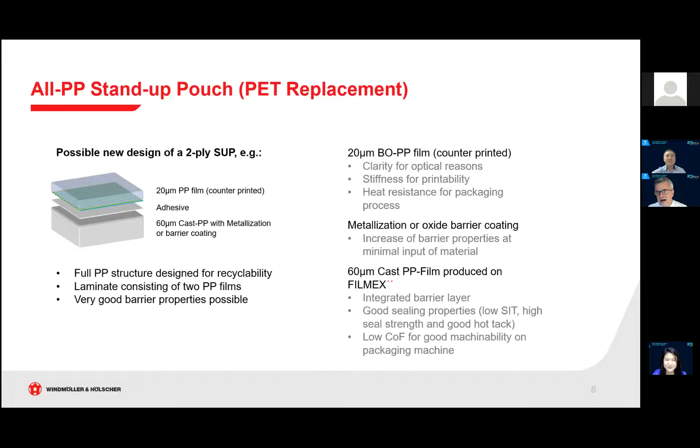Okay. Well, basically, I share the view which Marcus gave us, because first of all, if we want to substitute PET, we have to compromise regarding the properties. And if you look at the installed machine bases for BOPET and BOPP, the processes, the size of the machines and the speeds, one has to say that it will be hard to meet the price for the PET film. That's simply a matter of fact.

We all will have to pay, that's what I expect, more for a square meter of, say, stretched PE film compared to a BOPET film. And we will have to compromise on optical and mechanical properties. But the question is whether the properties of the stretched film are good enough. That's the important message: good enough to replace and to meet the requirements we have for these goods to be placed on the shelf in the supermarket.

For recyclability, there's a price we have to pay. And look at the installed machine base for PET film. It's so huge. It's a well-established process. The productivity of these machines is so high that it will be hard to meet.

Yes, but to buy a BOPET machine is much, much more expensive than to buy an MDO-PE machine, for example. Well, that's true if you look at the one-time investment. If you look at the productivity over the lifetime, and then do the calculation based on euro or dollar per square meter of produced film, then it will change. Correct. Okay.

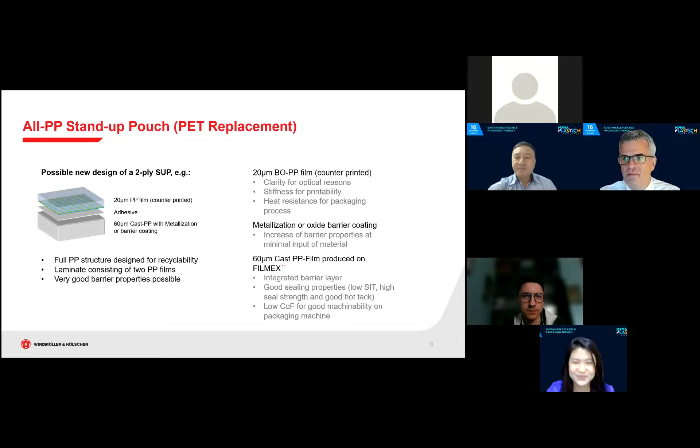Okay, so to address the first question, sorry, go on. Sorry, Alvin, maybe a comment on my side on optical properties, just to give you an idea. The haze of BOPET and BOPP is well below 3. You usually find values like 2.5, something like that, if you buy that kind of film. One has to say that this is a range which we will not reach with MDO-PE film, where I would say a value between 9 and 5 is realistic somehow.

But again, keep in mind that you take the PET film and do the lamination to a lamination film, blown film, for example. And then if you look at the total haze of this laminate, of this structure, then we have the question, is it transparent or is it printed? Then the haze, so the optical properties of the substitute for BOPET or BOPP film, are not that important to meet the 3 or 2.5, because what is important is the optical appearance of the pouch.

If you look at BOPET nowadays, and at the pouch, the haze of the pouch is completely different due to the blown film and the glue. So usually the good optical values of the PET drop dramatically if you look at the finished laminate. This has to be taken into consideration. So from my point of view, from a technical point of view, but also from a sales and marketing point of view, it is not important to meet the 3 or 2.5 as a haze value for the PET film, because you lose properties when you do the lamination.